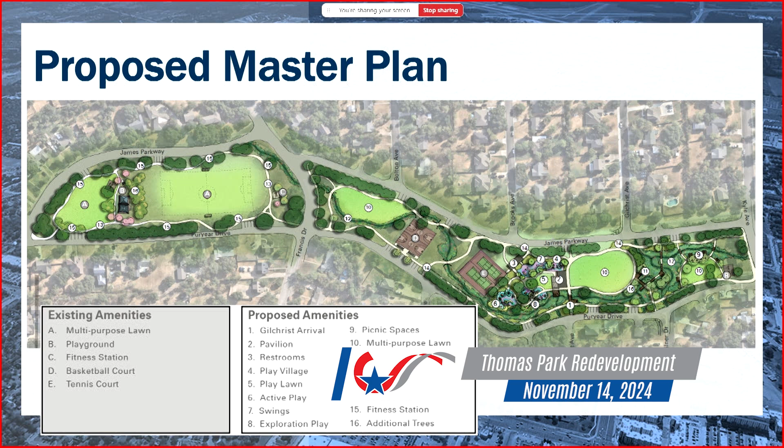Circulation is a big part of the improvement in the master plan, both with trails and sidewalks throughout the park. In order to develop that, we really looked at the users and how they traverse the park. North of Francis, there's a fitness loop that will be improved, and in addition there are trails throughout the whole south of Francis portion of the park. One of the main areas we wanted to improve in the proposed master plan is the creation of arrival points.

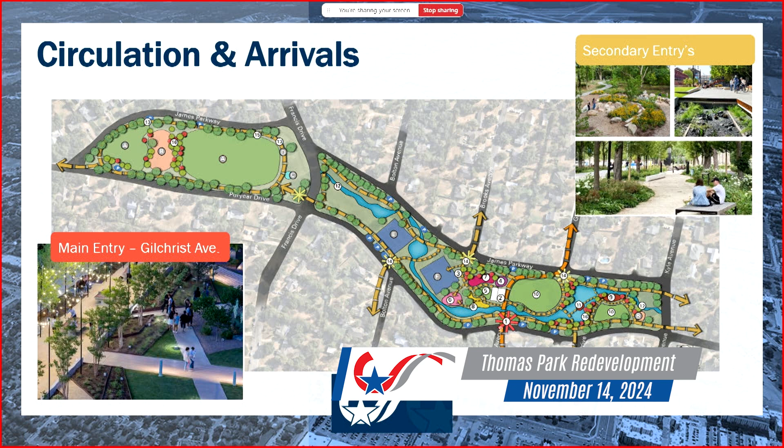Because you can get into Thomas Park almost anywhere, those arrival points will include a main entry off of Gilchrist Avenue and Puryear, as well as many secondary entries throughout the park at Francis and Puryear, Bolton Avenue and Puryear, James Parkway and Brooks Avenue, and James Parkway and Gilchrist.

We'll first focus on the area north of Francis. At this area, the proposed master plan has many of the existing programs remaining, including the playground, the swing set, and the outdoor gym.

Improvements would include adding additional trees to create a buffer around the existing playground area, as well as shade, adding areas for seating throughout, and the enhancement of expanding the existing trail that people use as a fitness loop, with the addition of trail markers.

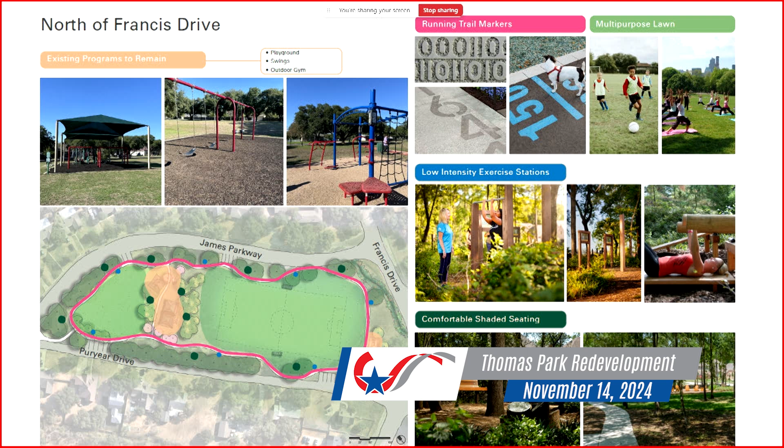The multi-purpose lawns that are there now would remain. There is a soccer court shown here just to demonstrate how big that area is—it wouldn't actually be striped for soccer, it's just to show the open lawn space. We would also add low-intensity exercise stations throughout the trail to complement the existing fitness structure, along with shaded seating throughout.

The next area that we'll zoom in on is in the central area south of Francis. This is a really active area of the proposed master plan, so it would include an active play area with spaces that would have swings, slides, and different elements for climbing. Not necessarily a traditional playground structure, but a really engaging space. It would have the play village, a discovery play area, and a habitat educational area.

And here's a concept of what that might look like.

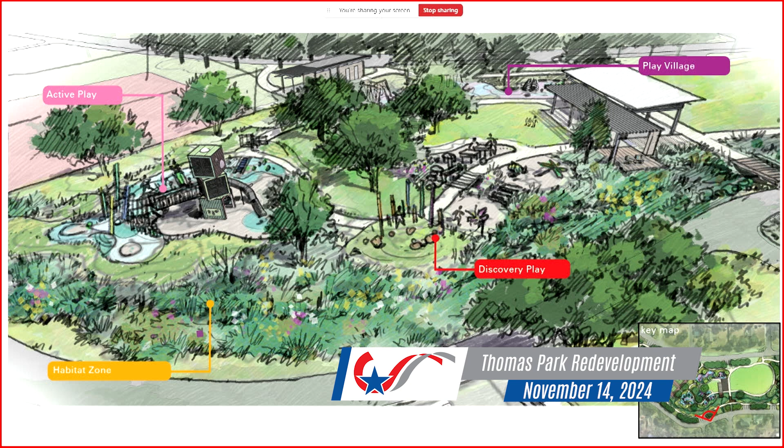The next area that we'll look at is the southernmost tip, closer to Kyle Avenue. This area would really focus on nature exploration. Most of you know the drainage that runs through Thomas Park. This would really highlight that. Rather than it just being drainage through the park, we would include habitat and educational opportunities, biofiltration and riparian zones to really filter the water. And maybe it has different, as you can see in the pictures there, stepping stones through it, so it really becomes an experience versus just the drainage throughout the park.

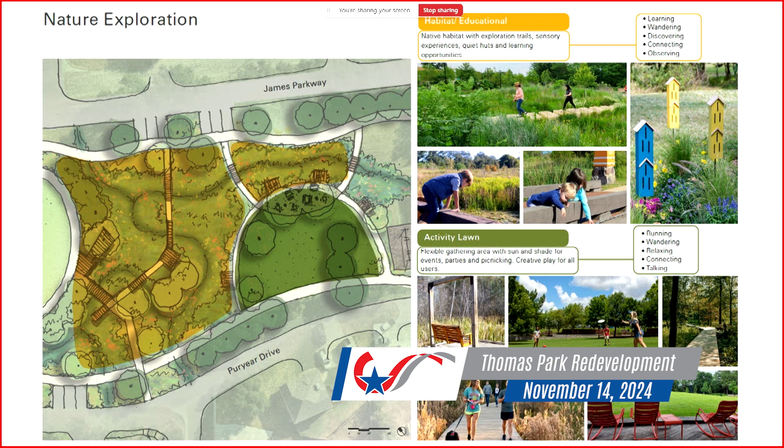The proposed master plan would also call for a pavilion and a restroom facility. You can see the structures there. The idea would be to design them so that they fit in with the makeup of the neighborhood.

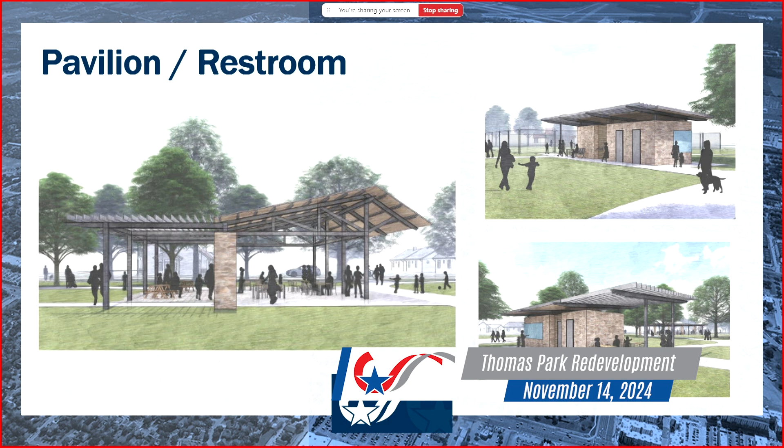The proposed pavilion there is really open air, inviting, and has an open concept. The restroom is proposed to have three different stalls, gender neutral, with additional shading on the side. This is another picture of the overall master plan.

And a high-level cost estimate of what the full build-out of this proposed master plan would be. This cost estimate is just a construction cost, and so it does not include contingency for the project, nor does it include a full design cost. The full design cost could potentially be 12 to 15% of the overall construction price, and contingency on a project of this size would be about 10%.

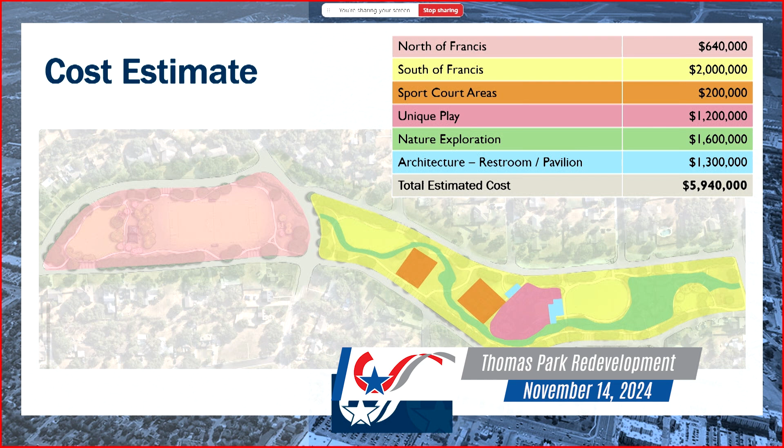Tonight we are seeking approval of the proposed master plan. And if approved, the next step would be for staff to bring back that design contract. And I'm happy to answer any questions you might have.

Just in general, what's our overall amount from the bond issue for this park? Yes, sir. The bond was $3 million. And then in addition to the bond package that passed, we do have the Mabel Claire Thomas improvement project that has a little over $2 million in it as well from 2019.

So some of this will not be built initially? It's phased correct, in over time? That's correct. We could certainly look at phasing through the design process. And that would come out of the design process to stay within budget.

Yes, sir. The other question is, on a park like this with all this vegetation, do we have any idea? I guess the design part would come up with this. The operation and maintenance cost is a lot of maintenance in vegetation. Certainly, that's a really good question.

And so a lot of the drainage areas where you saw a lot of the improvements, we'd focus on natural and native plants, and so they are a lot lower maintenance, but it would certainly have an increase in our operational cost. Yeah, so I assume that'll come out in the final discussion of what we can afford and what we can't afford at the time we get to the construction of phases.